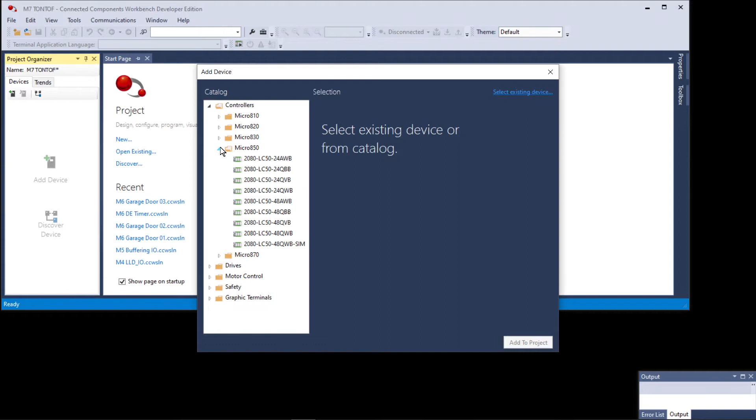New M7 TON TOF. Select a controller, Micro 850, Sim. Add to project. First thing we had you do, you have to have a program, and we're going to make it a ladder logic diagram program, and we're going to name it TON TOF. Open the program and add a rung of logic. We had a true-if on.

We used input 0. Now I can select input 0 from here, or I could have canceled the pop-up and just typed in input 0. Now input 0 in the garage door project was IN00. Remember, this is a brand new project, so I'm using the direct I/O. This is not buffered I/O.

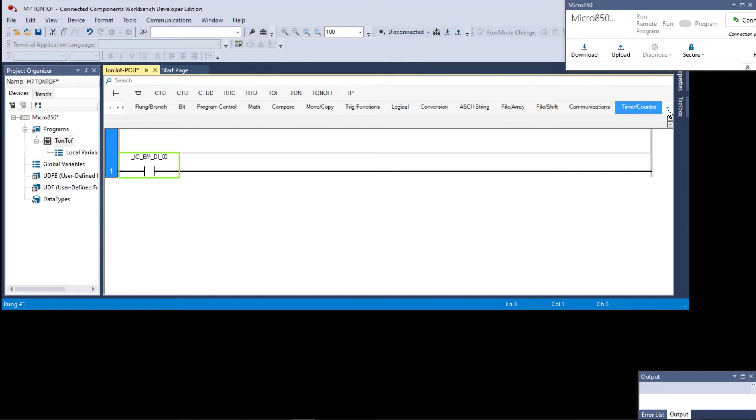That's why I said I'm going to mix it up a little bit just to give you something slightly different. Then I had you pull in a TON. I can get the TON from up here, but just to give you a little exercise on the toolbox, I'm going to select the toolbox. I'm going to grab an instruction block and drop it in here, and it comes up what type of instruction

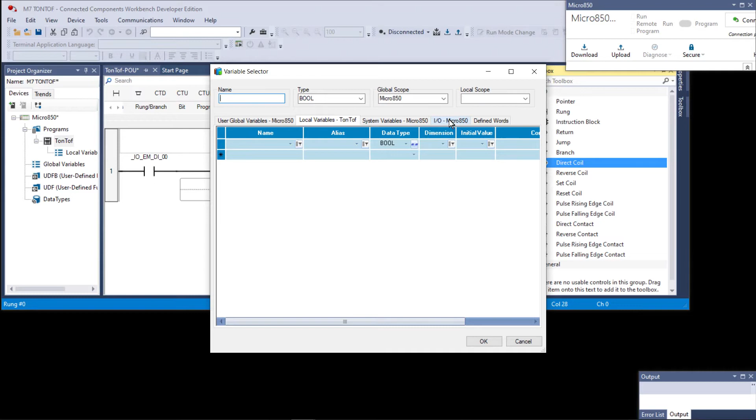block. Now, before we typed in TON, I'm just going to scroll down to the T's. Right there's the TON. Double click on it, and there it is, TON1. Now I'm going to add a direct coil, drop it in there, and we're going to use output 0. So we go to the I/O, back up to the top, output 0.

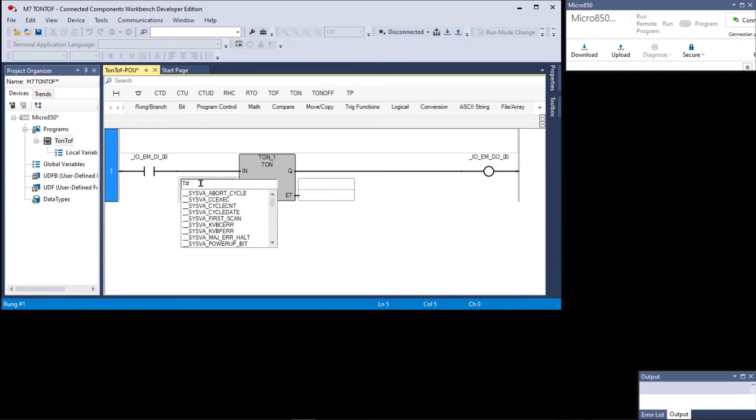And this is the rung of logic that we had in the manual, except this was IN00 and this was OUT00, and it has some names on it. I also had you put in a preset of 2 seconds. Now, I tend to use thousandths of a second, so T#2000 milliseconds. Then I had you save this. We already have a name, M7 TON TOF.

Save it and download. And of course, we can't download because we don't have our simulator running. Remember, this is a new project, so we have no path. See, there's no connection path. And that's one reason for mixing it up a little bit like this, is so you don't get used to having everything already set and you have to redo some of the things that you've already learned. So the first thing I have to do, I can't connect unless I have a controller to connect to.

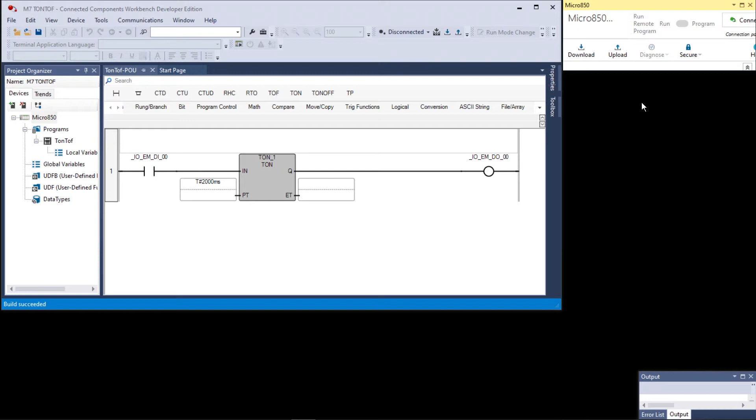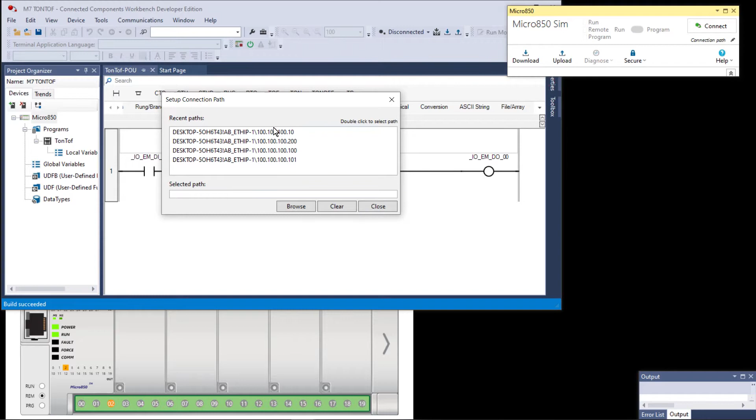So I'm going to start the simulator. And of course, this is the correct IP address. I'm going to power it up and then drop it down below out of the way. Now I'm going to go over here to connection path. I'm going to drag this out. We need a little bit more space. I'm going to hit the edit, set up connection path. I'm going to select it, double click on it to get it down here, and then close. We can download. I'm going to move this back out of the way, download.

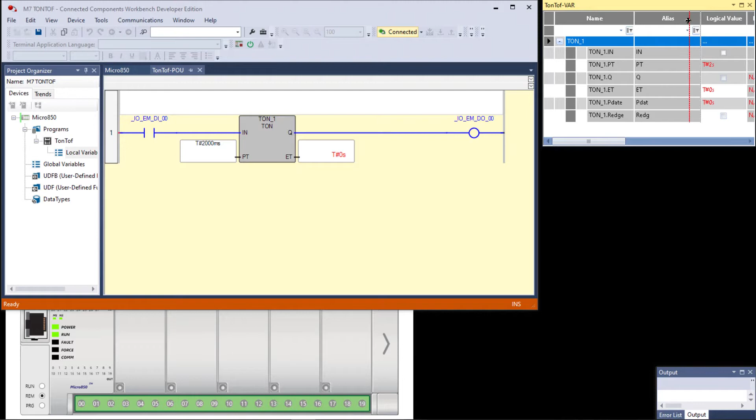Just for grins, I'm going to open up the local variables and expand the timer data type, the TON1, so you can see the variables. I'm going to collapse alias a little bit so you can see the logical values better. Now I'm going to turn on input 0, watch the time accumulate here, and after 2 seconds it turns on output 0. You can see output 0 down here turned on. Turn input 0 off and you can see that the ET resets.

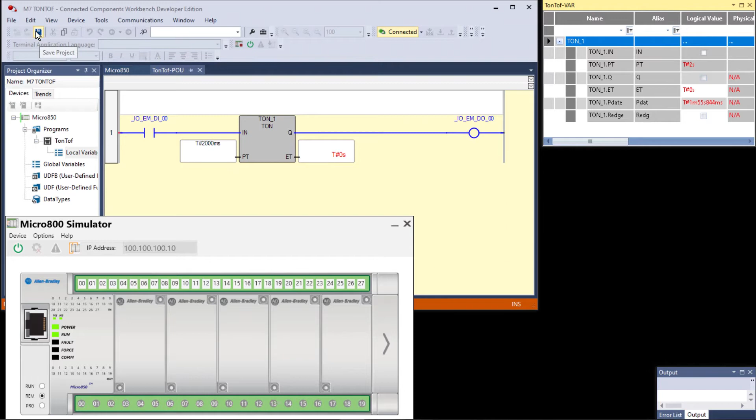Now save and go offline. It's not necessary to save, but by habit I save and then go offline. And then I had you add some more logic. Drop down a branch around, pull the OTE or the direct coil inside, down to our branch around, a true if off, and we don't have to go back to favorites. We can go to bit and grab a true if off, and we want that to be the Q bit

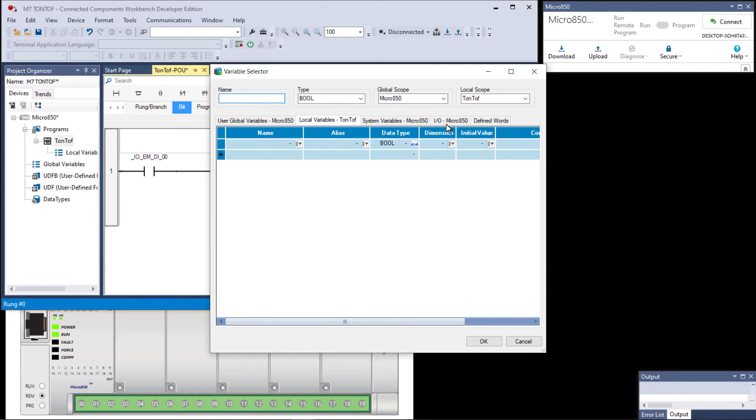for TON1, and drop down a direct coil, and the direct coil is going to be output 1. So we go to the IO Micro850 and we pick the next output. Now we still have something here. We need to add the done bit, if you want to call it that, Q from TON_1. So we go up and type in TON

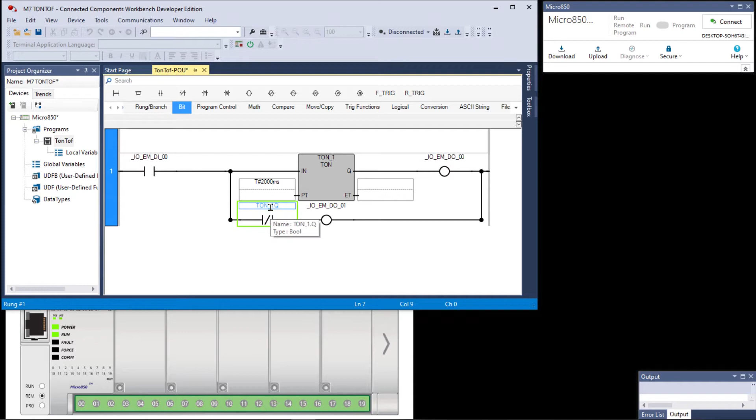dot Q, and there's our logic. Now I had you save and download this. We're going to operate this timer. I want you to watch the relationship between digital output 0 and digital output 1. It's just as easy to watch it here in ladder logic as it is down here on the simulator.

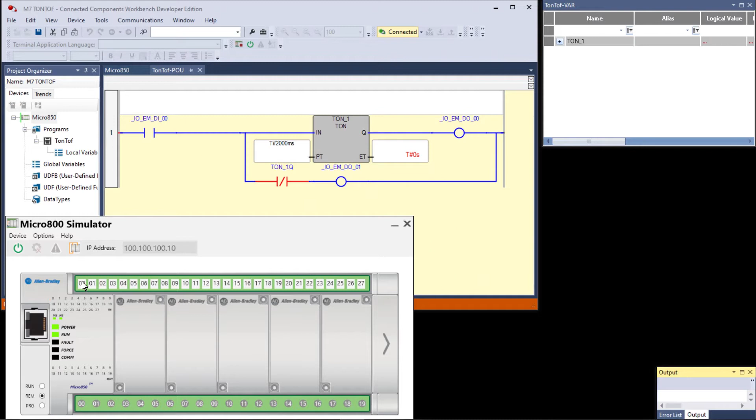I'm going to turn on input 0, and you see that the not done is on right away, then the done comes on. Or rather, I should say, output 1 goes on immediately when it's enabled, stays on for 2 seconds, and then goes off, and then output 0 comes on. So you could say that output 1, digital output 01, right down here, gives you a 2-second pulse.

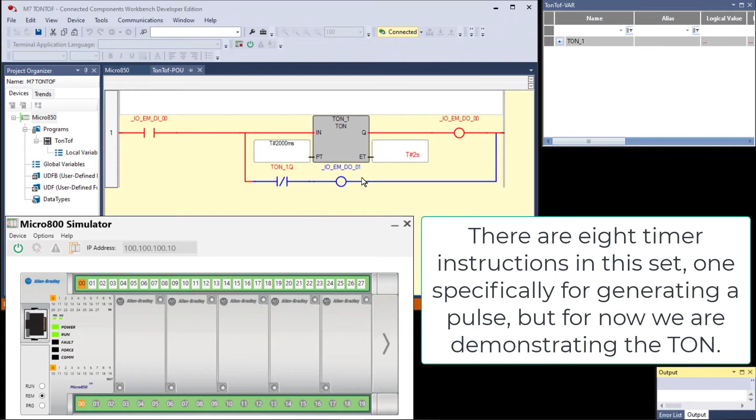And you could use this logic right here to create a pulse at whatever this bit is. Now we did it at digital output 1 just so you could see the light come on down here. Let's do that again. Turn off 0, turn it back on. See, 1 comes on, it's on for 2 seconds, goes off, and then 0 comes on.

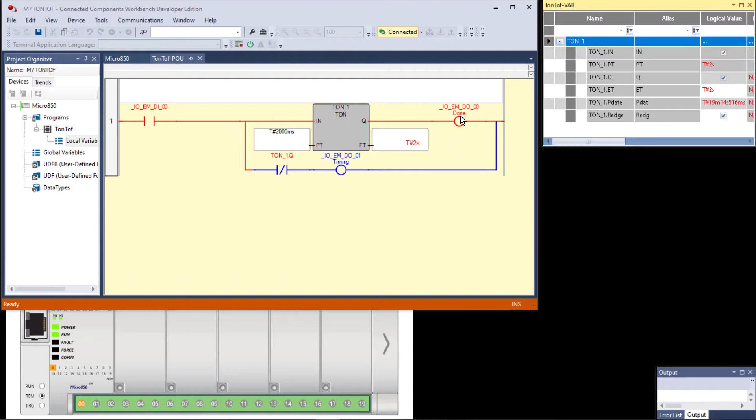Just for grins, I went offline and put aliases on these two I/O addresses, memory addresses, done and timing. We'll exercise this again. We turn off input 0, that resets everything. We turn it back on, it starts timing, and while it's timing, this bit is on.

And it's not that you have the not Q or the not done. You have to have the enable and the not done. If you got rid of this or moved it inside here, it would not behave the same. So watch it one more time. Turn off input 0, everything resets. Turn it on, the timing bit comes on for 2 seconds, off, and then the done bit.

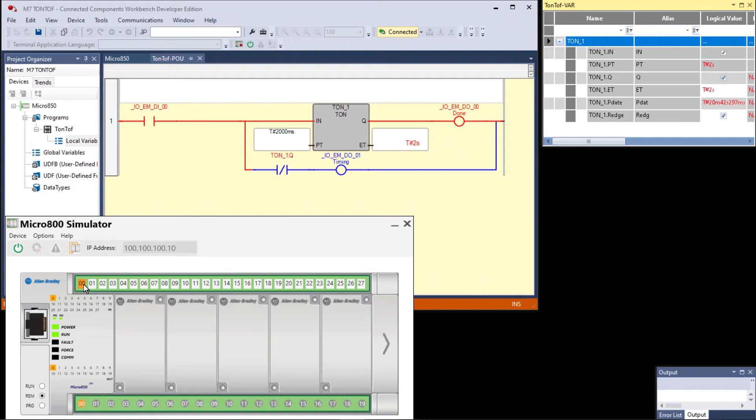So I'm going to go offline and change this up a little bit, and I'll be right back. What I'm going to do is to move this instruction inside. So now the only condition for timing is not done, and you're going to see that the timing and the done don't behave the same as they did before.

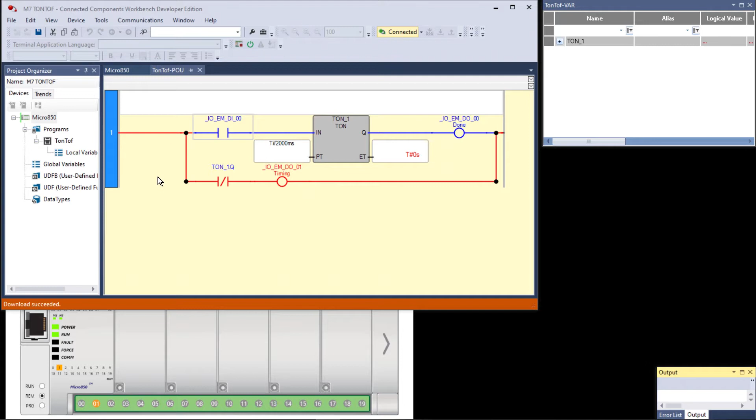Notice now that we move this condition inside of the branch that the timing bit is on all the time now, and when I turn on input 0, nothing changes with this bit until it's done timing and the done bit comes on. So watch the done bit and the timing bit. One's on, the other's off. Then they trade places. We're not using the enable now as part of the logic for the timing bit. That's important to make note of.

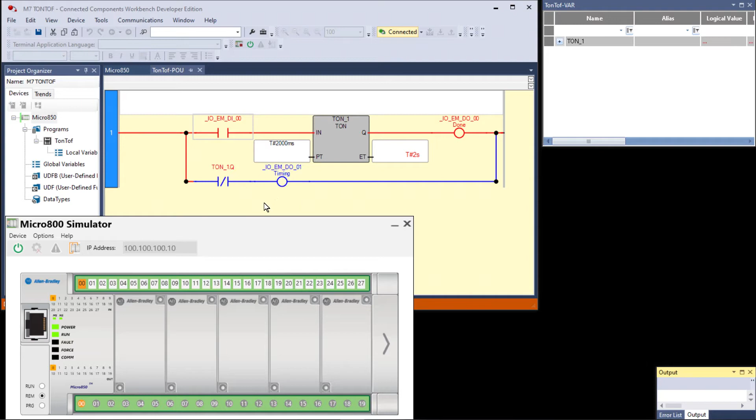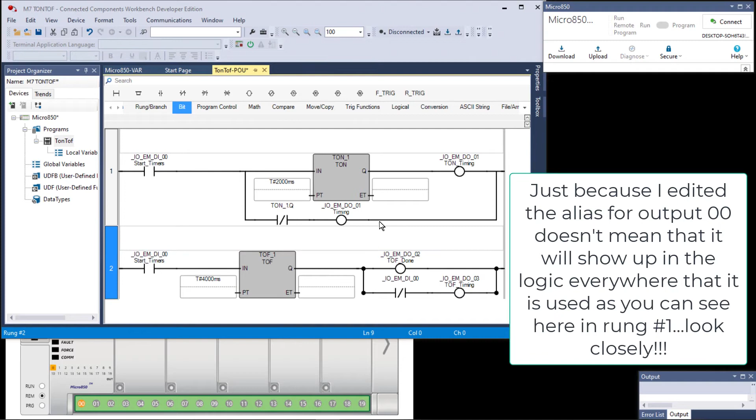Now we're going to add another rung to the program for the TOF instruction, timer off delay. I added a second rung of logic. I used the same input to start both timers. I did give the TOF a longer preset of 4 seconds or 4,000 milliseconds, and I added a full complement of aliases. So now this says start timers, TON timing.

Okay, let's operate these two timers. We're going to right now notice that the done is off and the timing is off for the TON. The done is off and the timing is off for the TOF. I'm going to turn on input 0 and notice that the done bit comes on right away on the TOF, and then when the TON times out, the timer timing bit went off and the done bit went on. So compare those two right now. Both of them have an output from Q.

Now I'm going to turn off input 0, and if you look at the TON, it's going to clear, but pay attention to TOF. It starts timing, and the done bit was on and the timing bit. Let's do that again. Done bit and the timing bit is on. It is timing right now during the 4 seconds.

And the reason I don't care for the TOF is you turn on the enable, okay? The done bit comes on right away. Try that again. Watch the done bit right here. Well, we're going to have to let it reset. Okay, watch the done bit when I enable the timer. It comes on immediately. And it stays on indefinitely.

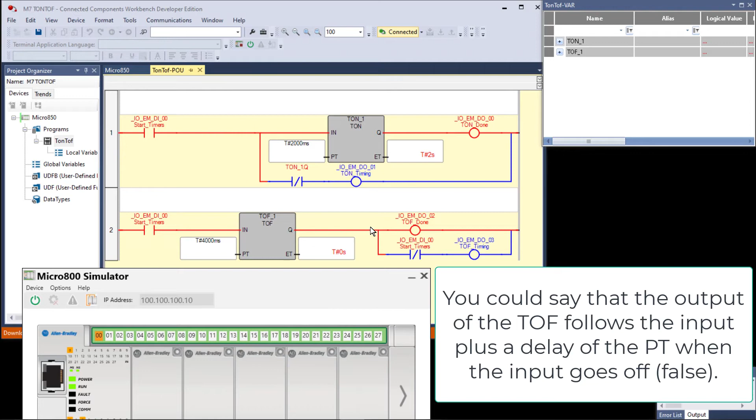As long as it's enabled, Q output is high, on, and not until I turn off and the rung goes false, then it starts timing. Done bit's still on, and as soon as it's done timing, the done bit goes off. When it's not done, it's done, and when it is done, then it's not done. So the done bit, the output, comes on immediately and stays on, but it's not done. Then if you turn it off, it's still done, but as soon as the timer's done, then it's not done.

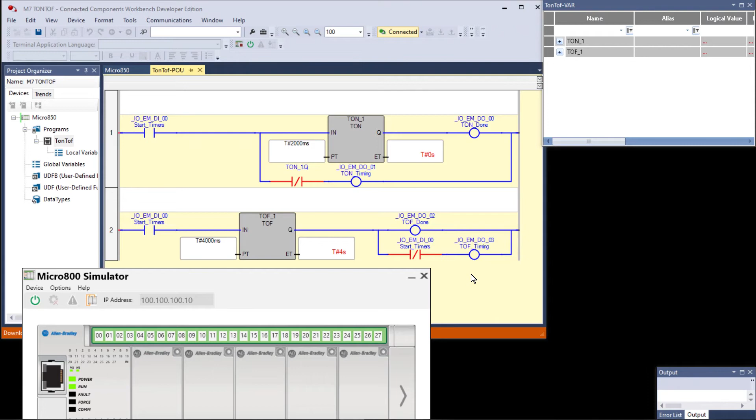Now they're not calling it the done bit and the timer timing bit. They're just calling it Q, and then we created logic for a timer timing bit. This is primarily for the RSLogix users who may not be comfortable with this format of timer instructions. This is how you can create a timer timing bit for these two instructions. Save and go offline. And now we're going to edit the logic to make a TON behave just like the TOF. Here's our logic.

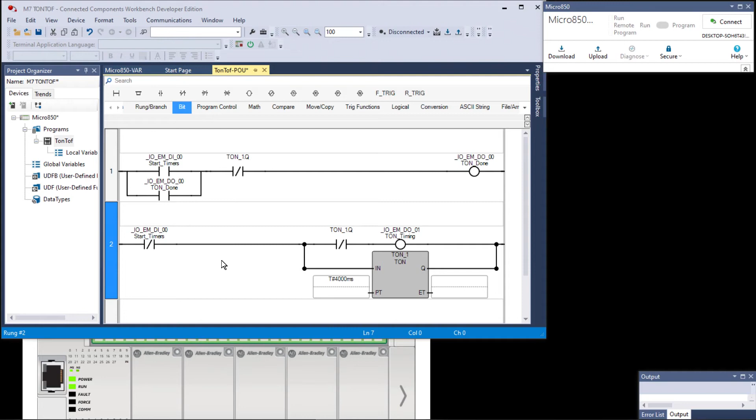We replaced the TON rung. We edited this rung, added this rung that works with this rung to give us the TOF function using a TON. Save and download. Here's our logic, and down here is our simulator. We're still using digital input 0 to start both of these timers.

What you want to pay attention to is TON done, which is output 0, and output 2, TOF done. So watch those two and then watch these two, TON timing, TOF timing. Okay, we're going to start 0. The dones come on, and it stays just like this. It's going to hold just like this indefinitely.

Because remember, with a TOF instruction, as soon as you enable the timer instruction, the TOF output Q goes high, and it stays high until you turn off the input and the delay goes by. Now these are both set at 4 seconds, so we can watch them work evenly. So everybody look, the done bits are on, right?

Now let's turn off input 0 and see what happens with the timing bits. That's output 1 and 3. Notice they're both running and the done bits are both on. And as soon as it hits 4 seconds, everything goes off. This is an off delay timer.

Now remember that this logic down here is not part of the timer. I just put that in there to give you a bit so you can see when the timer is timing. And that would be like a pulse, the length of 4 seconds. And then up here, this logic doesn't belong to the TON, neither does this logic. What we've done here is shown you how to use a TON to get the same results as a TOF.

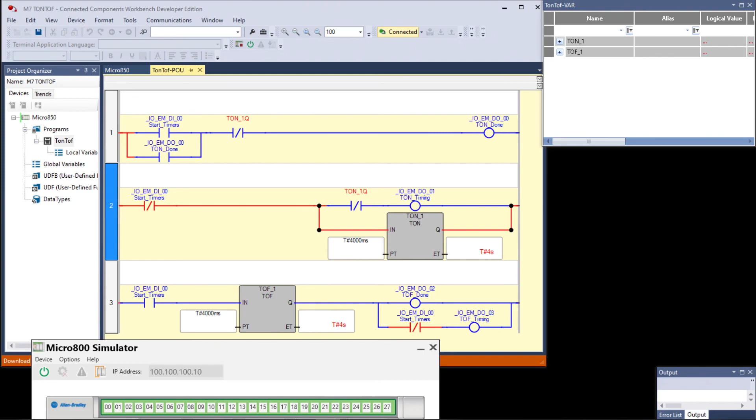From this lab project, M7, your takeaway is the comparison between the TON and the TOF, between an on delay and an off delay. And you can actually take either one of them and get something that behaves like the other. No reason to do that. Personally, I never use off delay timers except when I'm doing training.

And the only reason that I use off delay timers in my classes is because, remember, there are people who write code, write programs, download it in a controller on the assembly floor at the machine builder or the process builder. They troubleshoot these systems, they get them working. The customer comes in, does a sign off on the demo that it works. They do a sign off, they tear the machine down, pack it up, ship it to the manufacturing facility, and when it gets there, millwrights and machine builders come in and reassemble it.

Electricians connect all the wires back up, and then someone goes in and commissions it from the laptop, so to speak. In other words, they might ring out some I/O. They might do some preliminary tests, but primarily what they're going to do is make sure that it works as built on the shop floor back at the machine builder. So whoever wrote that program, maybe they just like TOFs, okay? I mean, there's nothing wrong with a TOF.